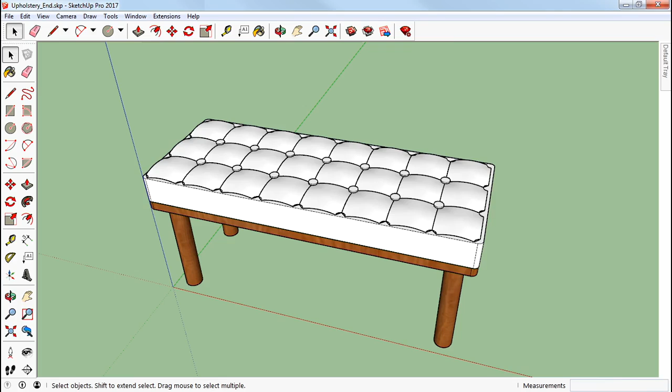Hi, I'm George Maestri, and today we're going to do upholstery in SketchUp, specifically a tuck and roll effect that looks something like this. So let's go ahead and get started.

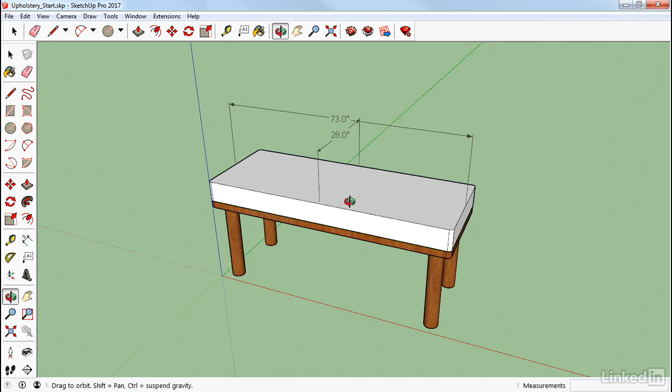I've already drawn my basic bench and a pad on top of it, and we want to add a tuck and roll effect on top of the pad. I put in some dimensions so we understand how big this is: 73 inches in one direction, 28 in the other. The reason I drew it this way is it gives me a half-inch border from 27 by 72, which allows me to create my effect 9 inches at a time. With 9-inch squares, I can do 3 squares this way and 8 squares this way to create the tuck and roll effect.

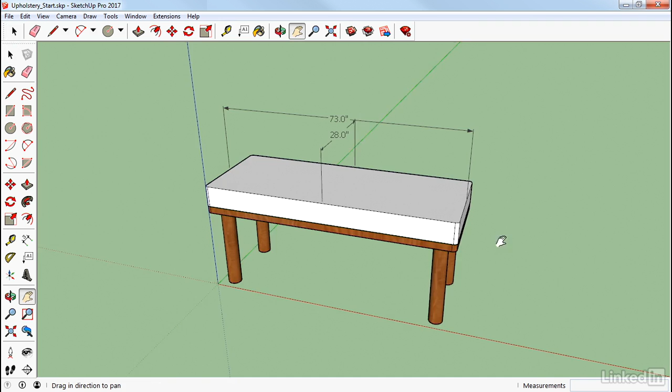The first thing I want to do is create my panel, based on a 9-inch pattern. I'll start with the rectangle tool and draw out a 9 by 9-inch rectangle. Then I also need a button for in between the little tuck and roll panels, so I'll select my circle tool and pull out a 1-inch circle. You can make your buttons any size you want, but I'm going to make mine 1 inch.

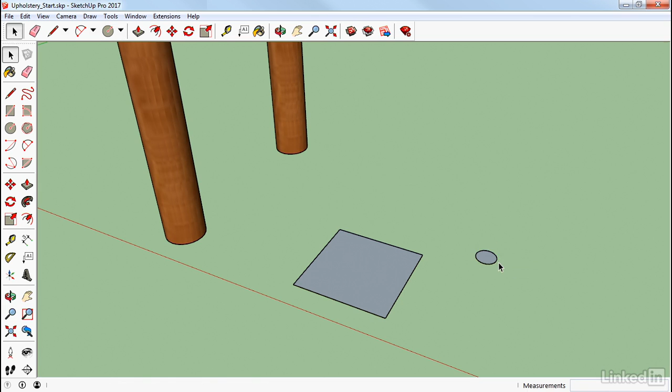I'm going to pull that up about 0.3 inches, just a little bit, then select it and make it into a component by hitting G. I'll call that 'button'.

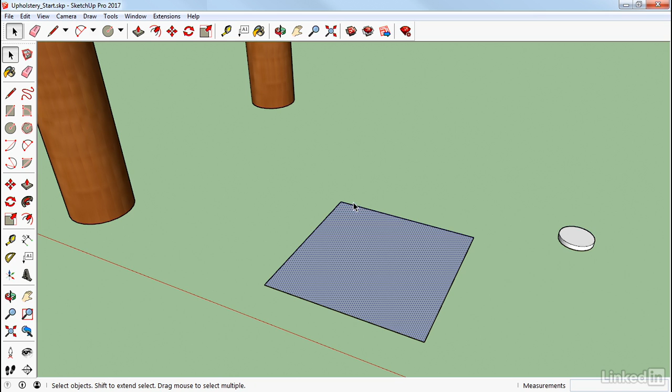Now my panel is flat, and that's not really what we want — we want it to be kind of puffy. So I need to create arcs along the edge, and also create insets where the buttons will pull the panel down.

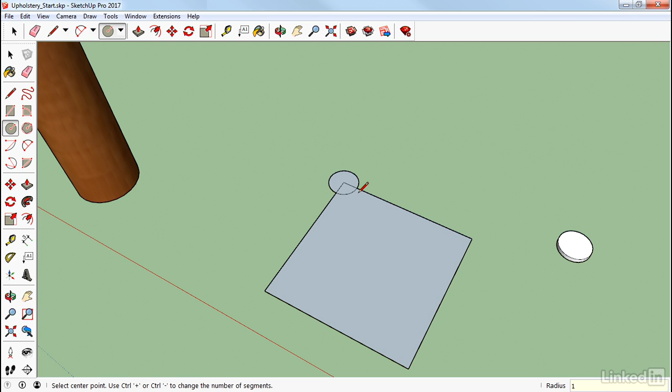I'll start off with some circles the same size as my button, which will give me room to place them. I'll snap to the corner, drag this out, and type in 1 to make it 1 inch. I'll do that for all 4 corners.

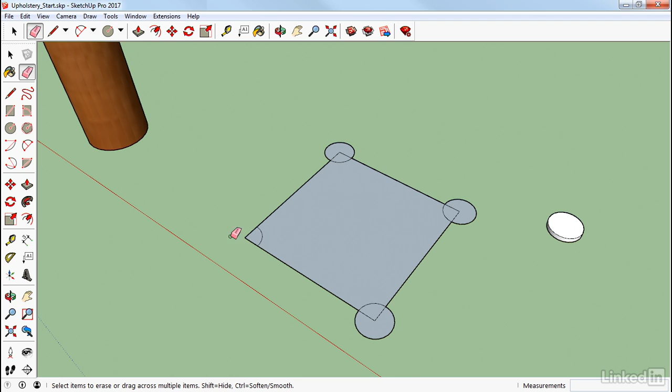Once I have that, I need to erase the extra lines, getting rid of this and this. Now we've got a little inset that's going to fit this button. I'll do this to all the corners, and if I move the button over here, you can see how it all lines up.

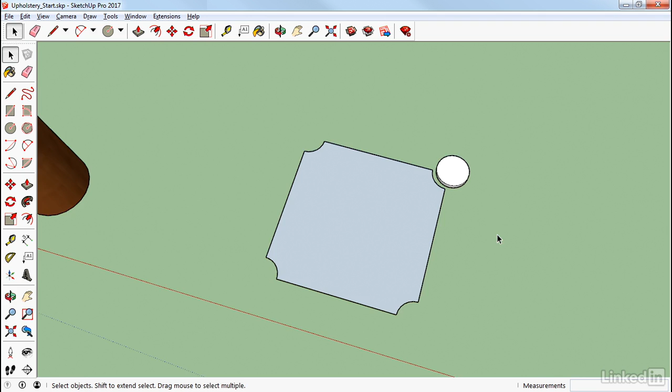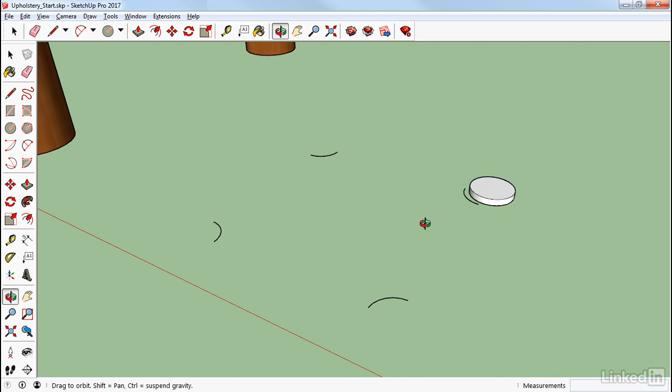Now we need to turn this into a puffy object by drawing curves that will act as contours for the Sandbox tool. First I want to get rid of all the flat lines here, so I'll erase this straight line, this one, and this one using the eraser tool. Then we're going to draw some 2-point arcs.

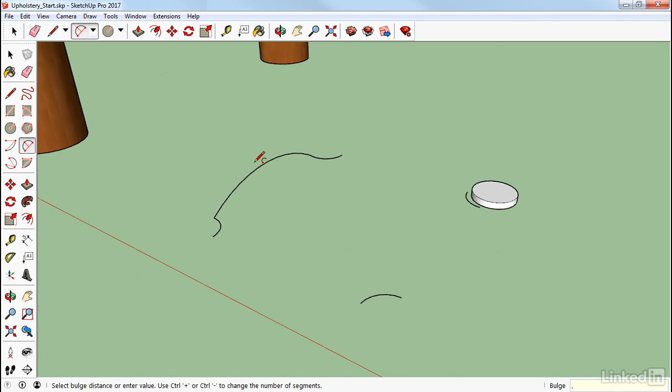I'll select the 2-point arc tool, snap to the endpoint of this circle, then the endpoint of that circle, and drag up in blue, hitting the up arrow to constrain it. Then I need to decide how high this is going to be — I've decided 0.5, but you can use whatever value you want. Remember, it's going to be lower on the edges and higher in the middle, so figure out how high you want the loft to be, and make the edges lower than that.

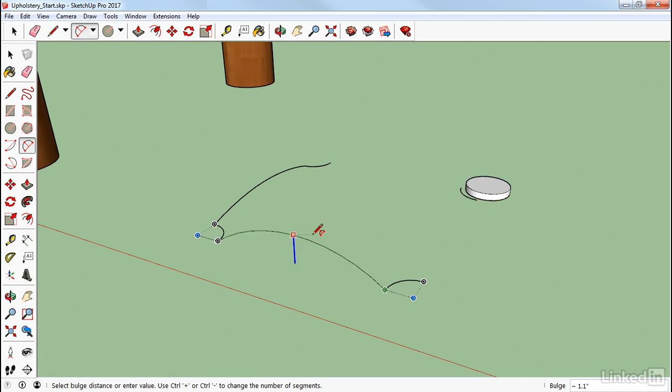Let's do this again: go endpoint to endpoint, hold down the up arrow to lock to blue, left click, then type 0.5. Again, snap, snap, lock, left click, type in 0.5 to get exactly the height we want. Let's do that one more time.

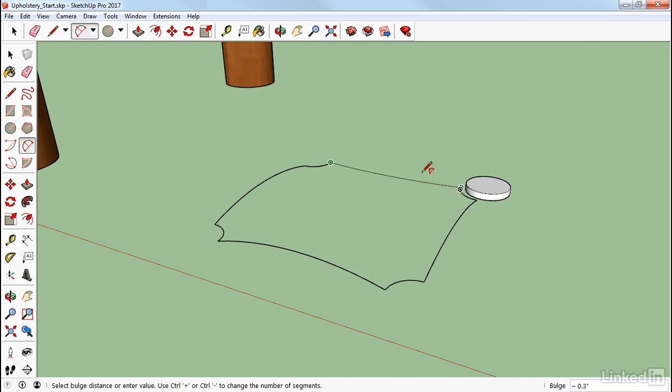And there we go. So now you can see I'm starting to get a little bit of nice relief here. Now we still want it higher in the center, so I need to draw two more curves.

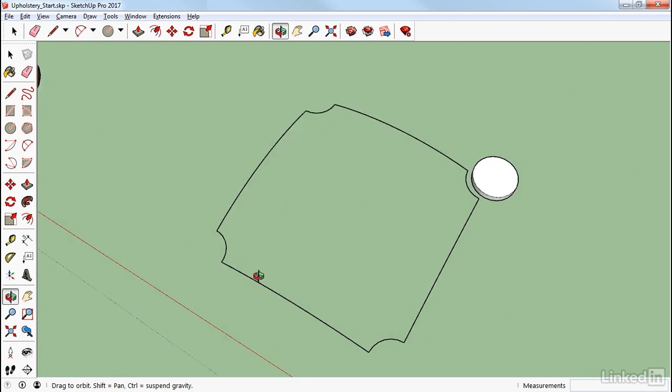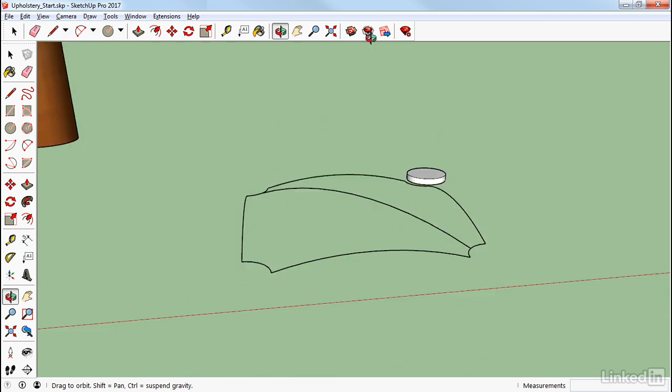So I'm going to go back to my 2-point arc, and this time I want to make sure that I get this at the very center of this here. So right there at the center, I'm going to drag this over, make sure it's at the center of that, and lock to blue. This time, this is my center point, so I'm going to type 1 inch. So now this is lofted up 1 inch above that.

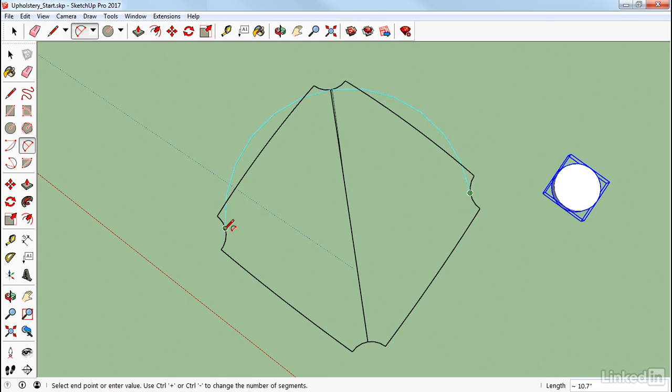Now, if I wanted to, I could certainly make it more or less. And then we want to do the exact same thing on this side. I'm going to move this button out of the way, and then make sure that's at the center of this. You don't want it on either side. Again, at the center of this, and then we want to lock to blue. And if it's not centered, it's not there.

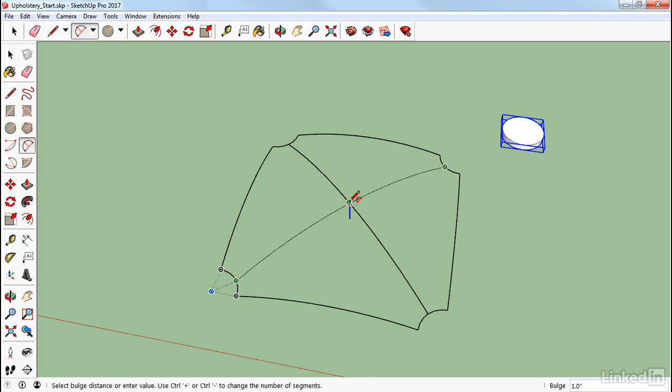Okay, so let's try this one more time. Make sure it's centered there, and then when you get it centered, it should snap to the center of the other curve. And we do, and you see the bulge down there is 1 inch. So now this is all locked together. So you want this center here to intersect and be in the middle of each of these corner circles. So now that we have this, we can make our surface.

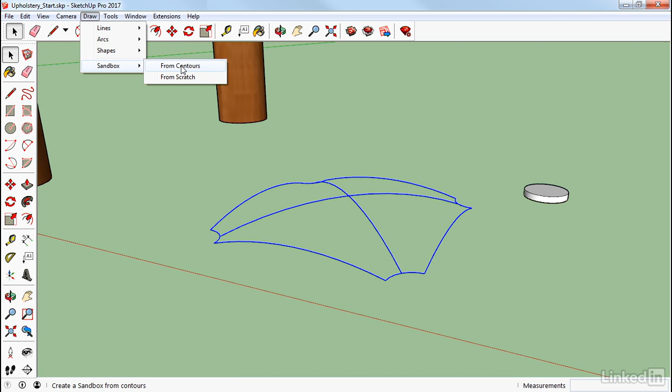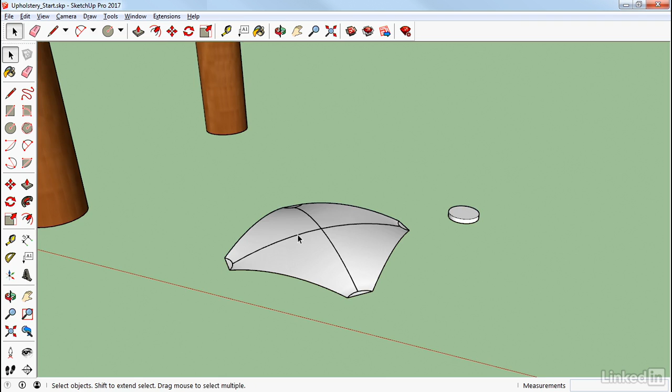So I'm going to select all of these curves, go into Draw, Sandbox from Contours. When I do that, it makes this very nice surface. Now the surface itself is a separate object, so if I were to move that, I can move it off of those contours and it would be a separate surface. For now, I'm going to leave this overlapping the contours just so it's easier to work with. We can see things a little bit better with these curves on here.

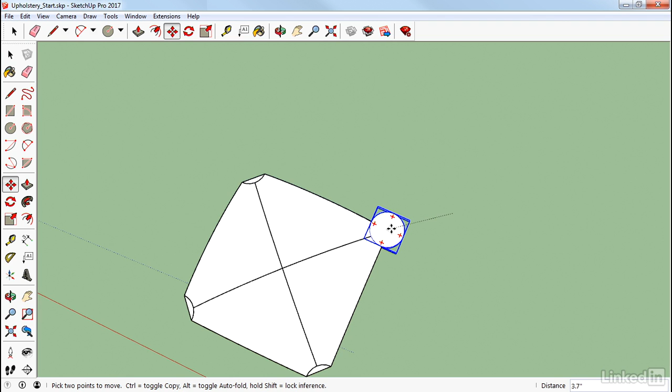So I'm going to go ahead and select this and then make that into a component by hitting G. We're going to call this panel. So now that we have the panel and we have the button, all I have to do is align this button to that panel. Looks pretty good.

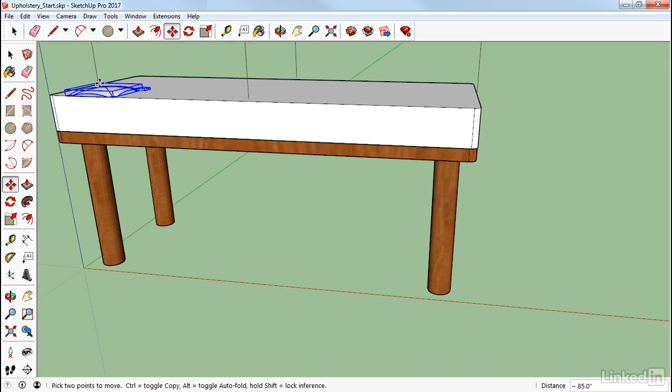And then we're going to go ahead and move those up onto the pad. I'm going to zoom out a little bit, and I want to move this here. So select the button and the panel, move it, and snap it to that. I want to position this so that it's slightly in from the corner and equidistant on either side. And that looks just about right. Now we can adjust these afterwards, but I want to get it reasonably close.

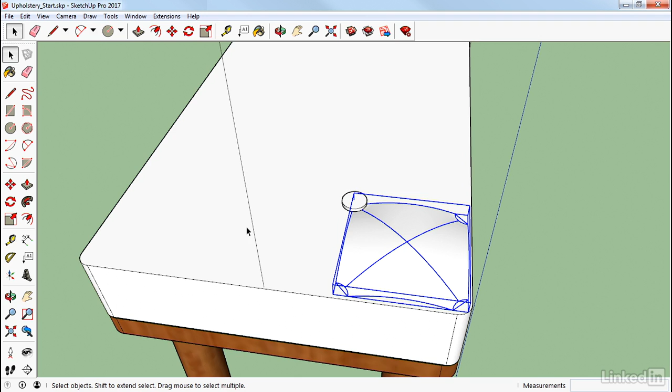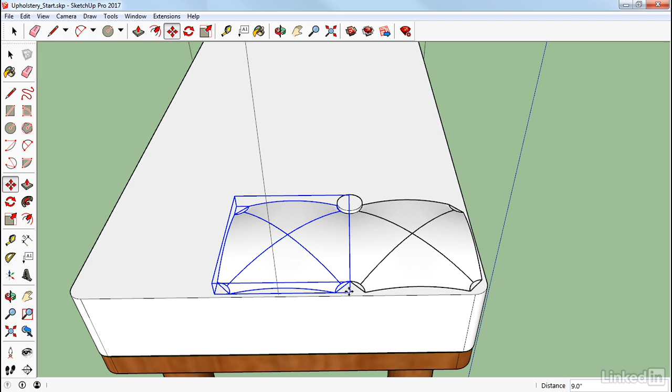So now that I have this, I can start to copy these panels. I'm going to go into my Move tool, select this far right corner here, and hold down the Control key. When I do, it makes a copy. Now I want to make sure that I snap to the endpoint so that I've got everything aligned. And when I do, I can then type times 2 and hit Enter. So now I've made 2 of them.

Hopefully you can see where I'm going with this. So I'm going to select my button, move it, hold down the Control key. Now I know this is 9 inches, so I'm just going to type in 9 and hit Enter. So now I've got basically my pattern set up.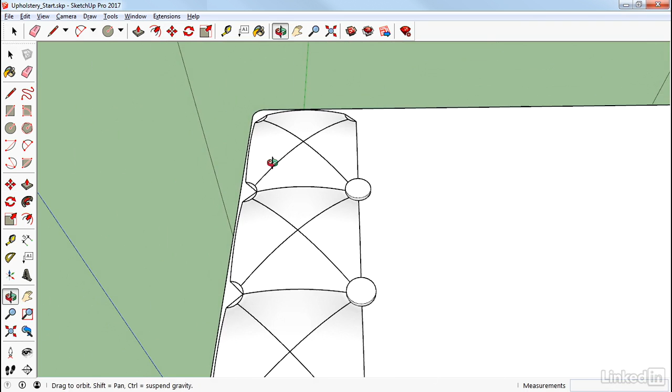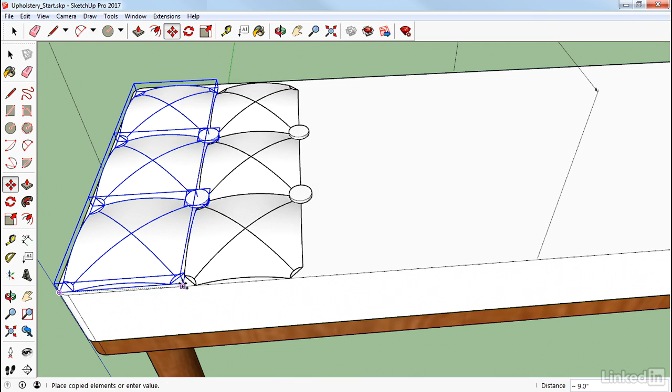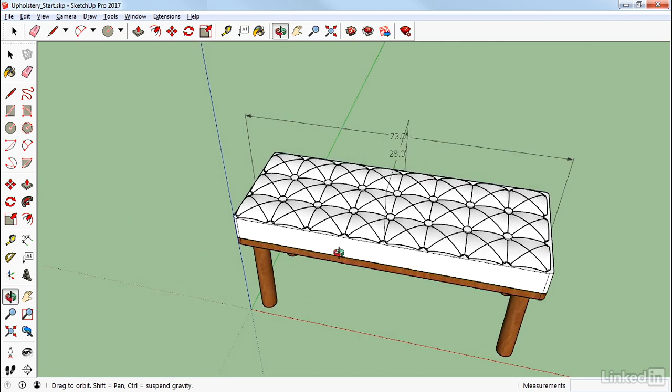So now select 3 panels and 2 buttons. Let's go ahead and select the Move tool, hold down the Control key, and again I want to select that bottom corner there. Click and drag and snap so that everything is lined up, and then type times, I believe the number is 7. And when we do, look what we get. Now, I only needed to do 6 buttons, but it's very easy just to select the excess ones and delete them. And then I'm going to select these dimensions and delete it so we can see it.

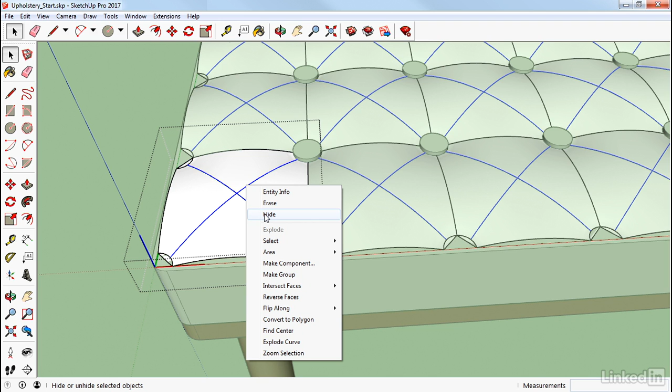So as you can see now, we've got this kind of tuck and roll top. Now, obviously, we've got some stuff here at the corners, but we could certainly put an edge treatment along this. And if we don't want these edges, we can double-click on one of the panel components and shift select those, right-click, and we can either erase or hide. I'm going to go ahead and hide this. And then, as you can see, we've got something that looks pretty much like tuck and roll.

So hopefully this gives you some insight into how to use Sandbox tools to create soft looking surfaces, as well as how to use the array functions in SketchUp.